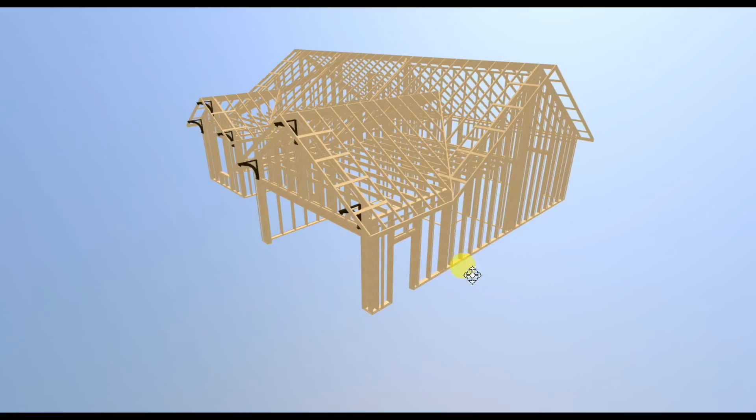Okay, so far we've talked about concrete, which is referred to as dynamic mass. That means that it's monolithic. It has solid mass to it, so that can be extended up into the walls and even into the roof here. So with concrete you're surrounded by concrete, which is especially good here and better than wood, I would say, at those ballistics we talked about, tornadoes.

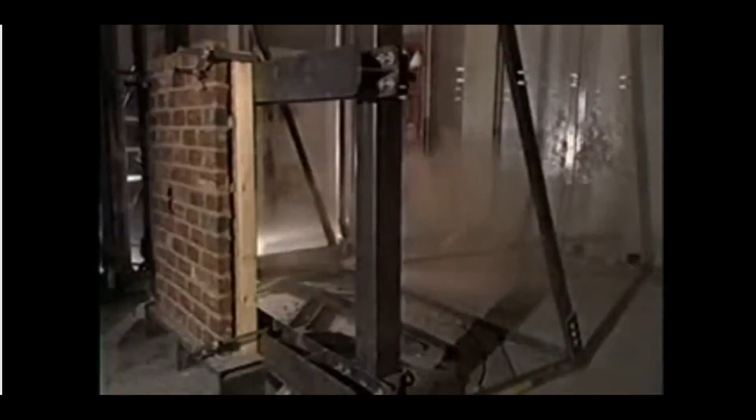Some of the only homes that survived, as proven by places like Moore, Oklahoma, had concrete walls. And like I said, if you get on Texas Tech's website, you can see that the concrete does pretty well, anywhere from 4 to 6 inches thick.

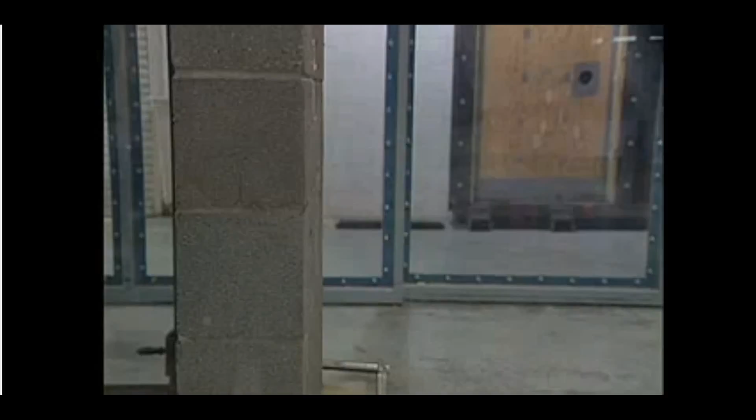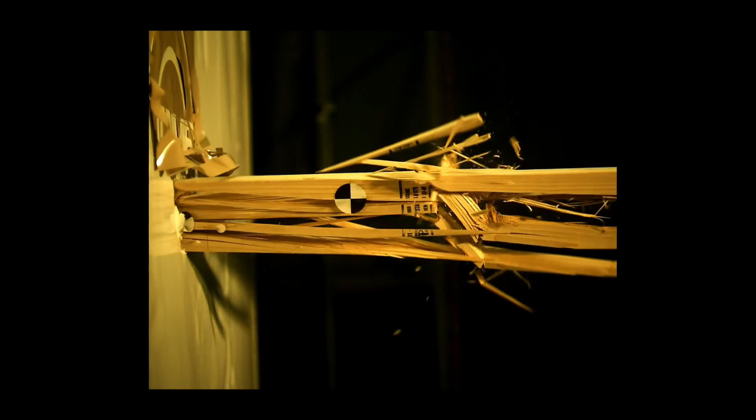So dynamic mass, meaning that it can absorb heat, hold it, release it when it gets cold at night, and then it can also hold and release moisture and keep the relative humidity in the house at a desirable level. Usually 30 to 35% humidity is desired for those mold and fungi properties that I discussed earlier.

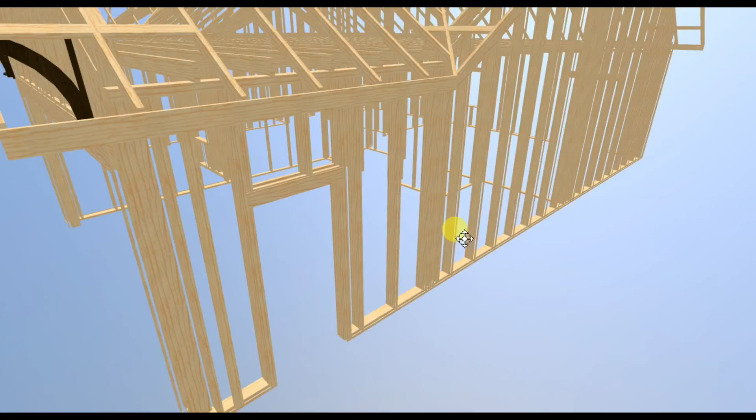So here, in what we've done and what most builders are doing out here in Wichita and across our nation, we're not only addicted to concrete, but we're also addicted to wood. And so what I'm showing here is our 2x6 walls. The industry standard that you'll find is 2x4 walls. Each one of these stud cavities is filled up with insulation. So that's one way we get our insulation values up. But there's more to it than that.

In our designs, there's an engineered gap between the stud and another layer of insulation, what's called outsulation, meaning that we wrap the whole house. In addition to putting insulation in these stud bays, in between these studs, we've put a big blanket of insulation all the way around the house, and then between the two, we have a ventilation gap running here. You can see the furring strips running on each one of the 2x6 studs.

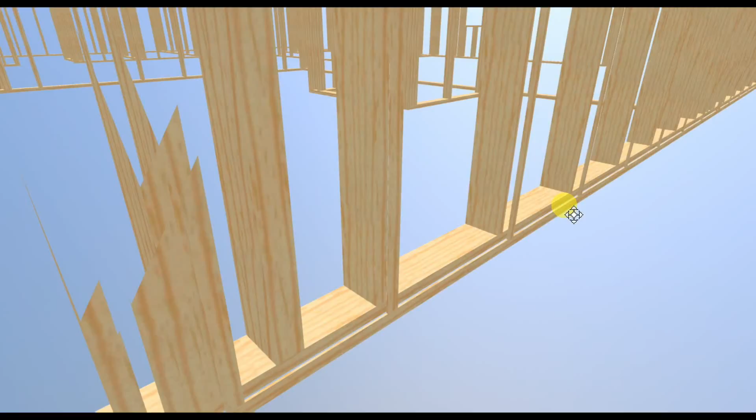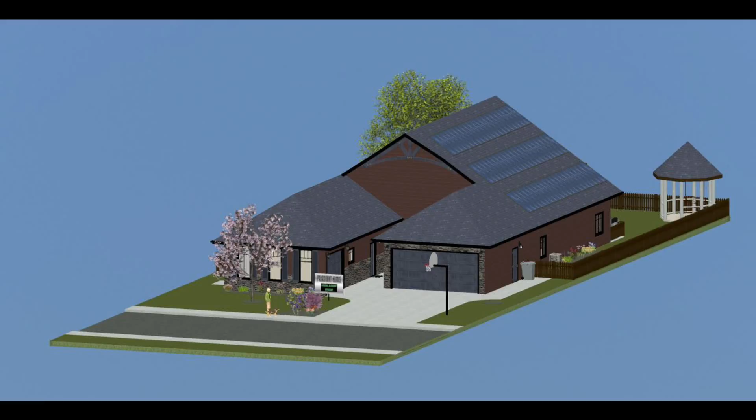So there's a gap here, and it's not just a gap, though. There's more to it than that. A lot of builders and designers that don't know any better think, okay, I just throw a gap up there and I'm good to go. Well, the purpose of the gap is so air flows around this entire house. So it's almost like you've got a house inside of a house. That ventilation gap, when we put on the siding that you see in the curb appeal of the house, preserves it better.

So I talked about how vapor drying needs to occur. Out of the wall and into the interior, there needs to be drying in either direction. So we've allowed for this gap here that has a certain flow, and that flow needs to be verified, that there's actually air flowing through here, so we can vapor dry into that gap. So there's more to it than that.

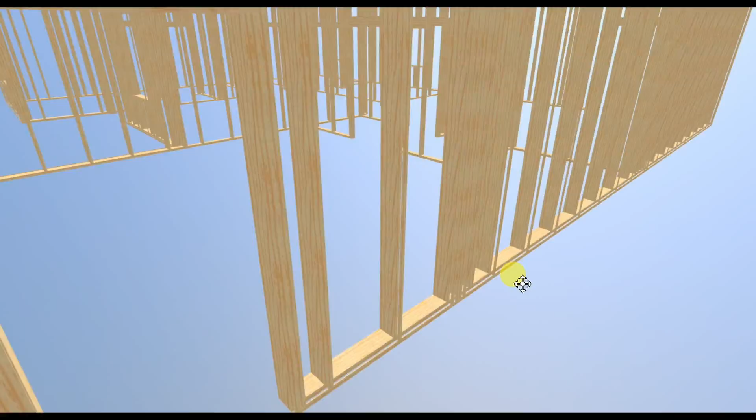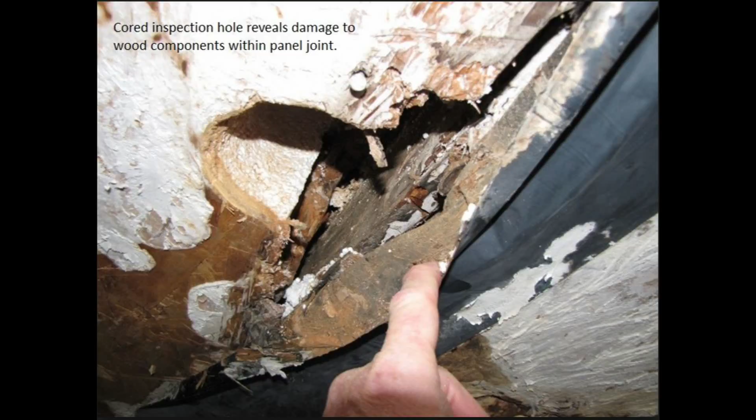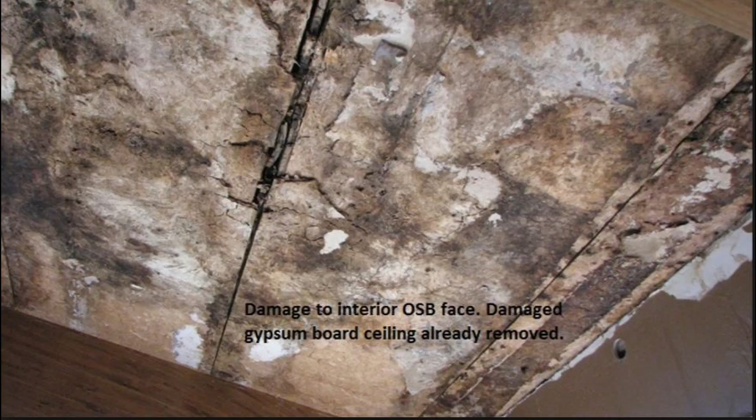There's what they call insulated concrete forms. I'll get into that in a minute; there are some issues with them I'm going to discuss. And then we also have a newer wall assembly on the market called structural insulated panel, where they take that polyurethane foam that I discussed the problems with. It acts like a vapor barrier, and they glue it into some OSB, a particle type of board that's glued together, and that whole assembly is not going to dry in any direction. So that's just a vapor lock, and there are some issues, especially where those panels come together at the seam. So get with me on more of that if you're interested.

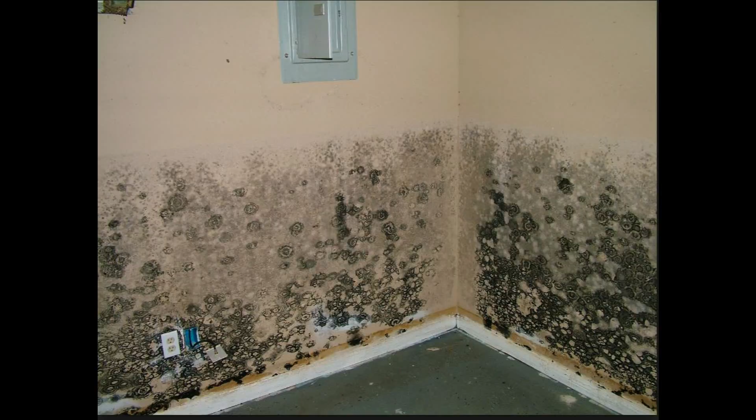If you're about ready to make a decision on a SIP or an ICF, you definitely want to talk to a qualified engineer about some of those issues. They're out there.

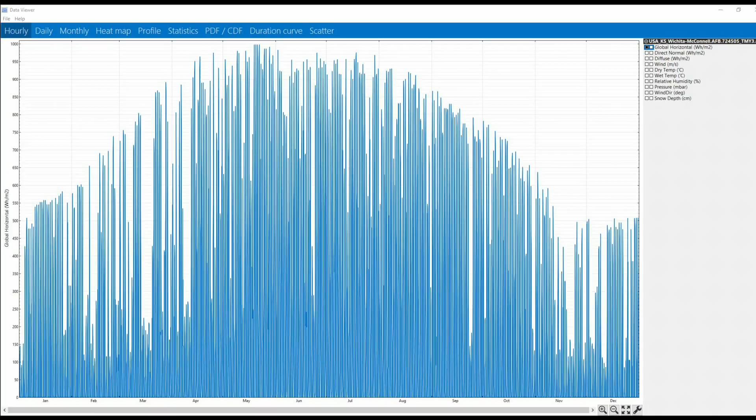It's amazing what computers can do these days. Maybe you're pretty impressed by some of these models I'm showing you, but the other thing they can do, that's more important, that a lot of architects and designers and builders don't have the capability to do, is called fluid dynamic modeling. So there's climate towers that we get our weather from here in the Wichita area, for example, and we could pull that into a simulation model that runs a bunch of airflow around the building, around homes.

It came over from Germany, and Germany has really got it down to a science. They got what's called a WUFI model. It's a fluid dynamic model. So, like I said, these gaps, you just don't throw them out there and hope for the best. There's some engineering involved in that.

So now we've taken what's called Passive House, or Passive House Institute US, a new German type of design philosophy that came over, and they're training people around the country, builders and tradespeople, how to build these airtight homes with the right flows. So that building science term is really taking off with the green movement, but there's a lot to know there, so you want to make sure the right person's doing it.

Everything I just said applies to the roof as well. So basically, let's conclude here by saying that there's two basic ways to design the walls and the roof. One is very highly insulated, where you have a bunch of wood, layers of house wrap. The house wrap doesn't really provide enough gap. It tries to, but when you push those panels up against the stud, you get what's called thermal bridging.

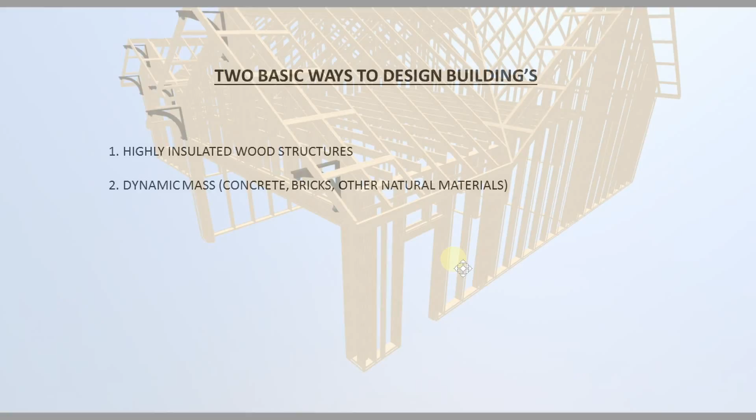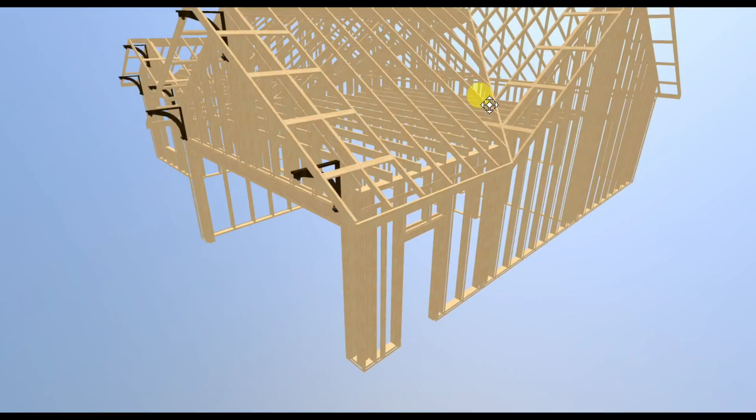That conduction again, that resistance to flow, conduction meaning that the heat goes right through the siding, and the house wrap doesn't provide enough airflow in a lot of cases or a vapor drying path. If you were to take a heat gun to one of these studs with a bunch of solid wood stacked on top of it, the heat can go right through the wood from the interior out, or the cold can get from the exterior in right through all these studs.

You can look up on the internet some pictures of a roof with snow, and you can see each one of these studs has heated the snow due to the thermal bridging, and you can see that the home's losing heat that way. So we don't want that. That's why we wrap the house. We put a ventilation gap in there to break that bridge and provide the right gap. So that's pretty much it for walls. There's a whole lot more to it I'm not going to go into.

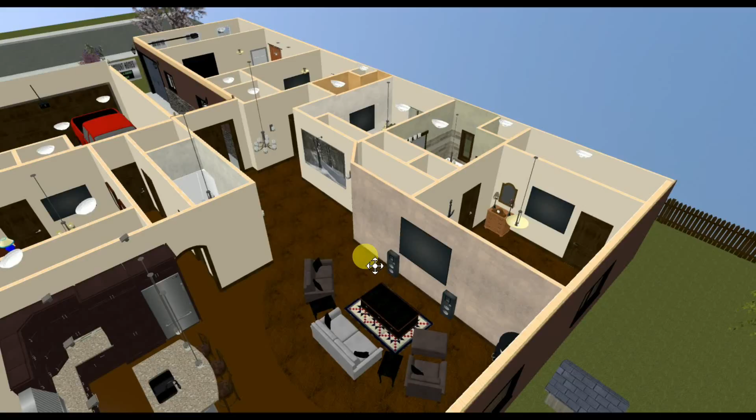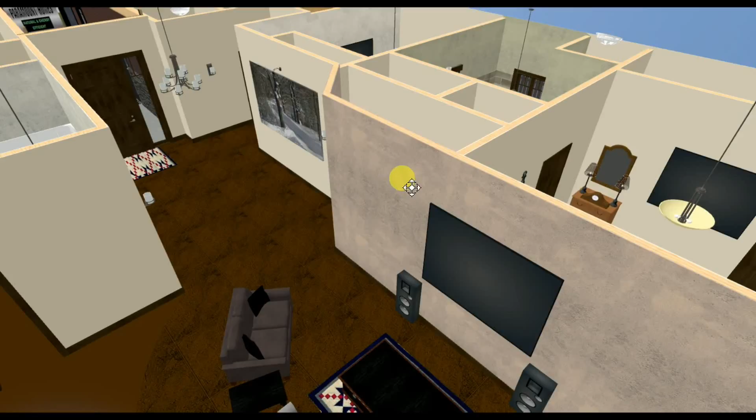So we talked about mass, and the concrete floors. We have hydronic radiant in these floors. It's very therapeutic. We utilize the mass of the floor and run some water through it. Water's got the best heat carrying capability, far better than air, 1,000 times better than blowing air around. So we utilize it with the mass to emit a very comfortable therapeutic heat that doesn't have a bunch of nasty microbials affecting your indoor air quality.

Another thing that we offer as an option is this American clay product that is very nice, very beautiful, that we can put on the walls to help increase that thermal mass and moisture holding capability in the house. You put an inch or two of this stuff inside your house.

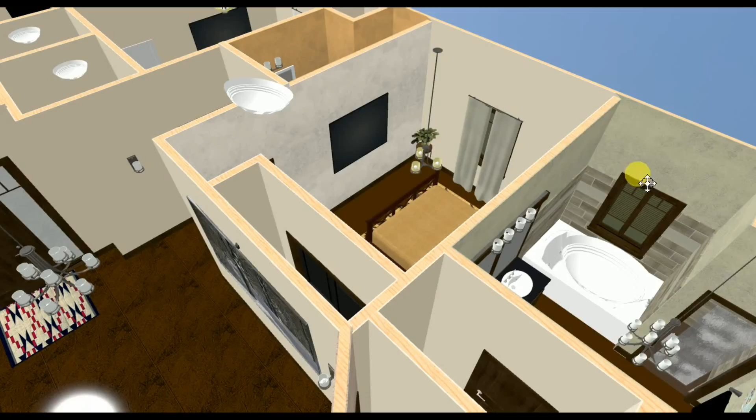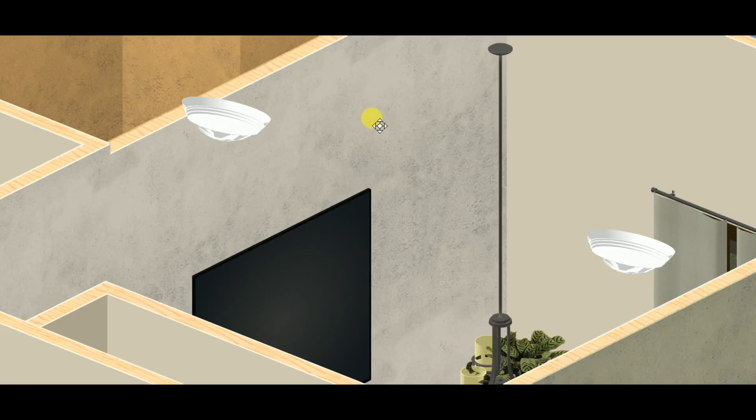What that does is, because it's taking down the humidity level and storing it in the walls, the cooling system doesn't have to be turned on to dehumidify the place and give you that cool feeling. So that helps out quite a bit, especially here in the bathrooms. You can see some other colors that they have here in the bathrooms. If I get up close here, you can see it's kind of got a two-tone.

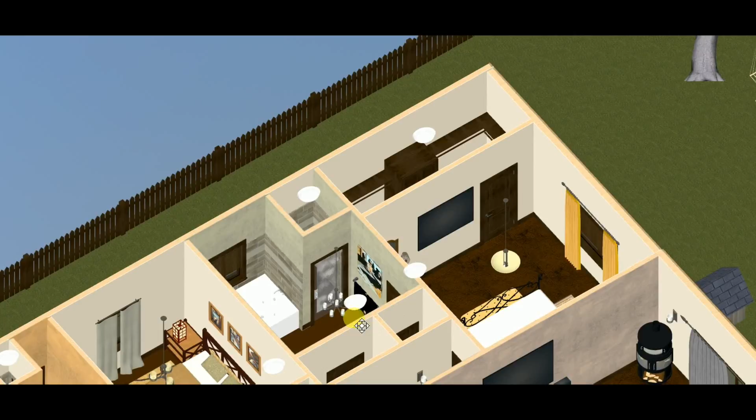You've got all different kinds of options on American Clay's website. We also have other proprietary blends, lime, other types of materials. Think about lime here. It's nowhere close to OSB. It doesn't degrade like wood or some of these other floor laminates and glue products. It doesn't start degrading when it sees moisture. It actually improves. Lime, for example, is limestone.

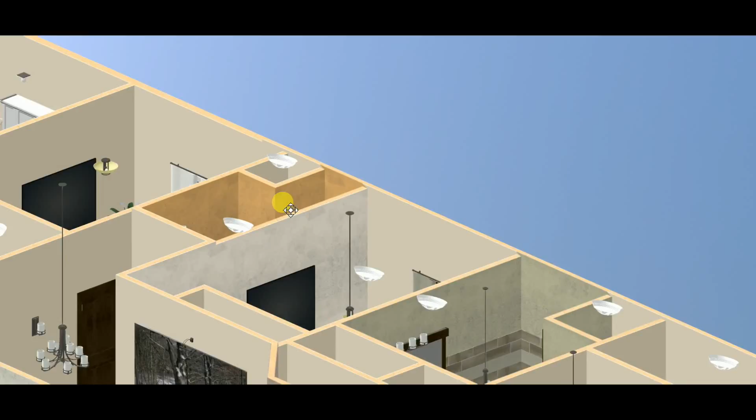So when you put the stuff on your wall, every time it sees moisture, it's actually trying to convert back to a rock, so it absorbs and holds that moisture that these other materials don't do. They degrade, and it just gets stronger and stronger and stronger. So, like I said, not all materials are created equal.

There's a lot to know about the type of materials that are in your house and whether or not they're going to deteriorate in time, and whether or not they're improving the indoor air quality, and either they repel moisture or they love it. In the case of lime and earth plasters and different types of natural finishes that have been known for centuries, they get better.

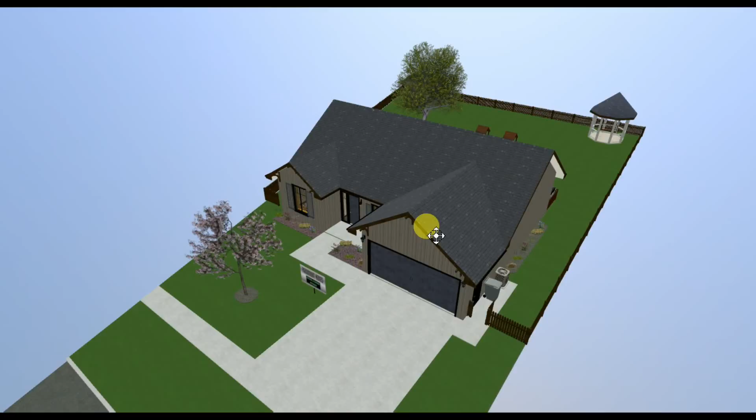Those are the kind of things that the manufacturers don't want you to know. You can find some of these materials in your backyard. The building sciences won't promote them, and you won't find them in building codes.

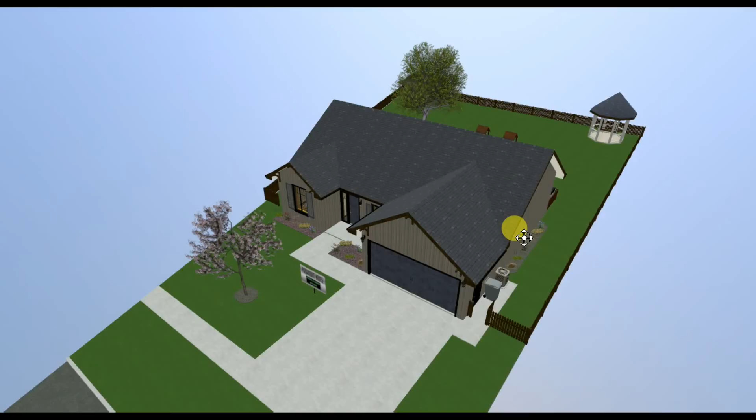I mentioned briefly in the Paraflat and the Paraflex videos about the ventilation systems that we're putting in these homes because we blower door tested them. And so there's two different types. There's what's called a heat recovery ventilation system that doesn't help manage the indoor humidity levels and keep those cooling bills down. There's also an energy recovery ventilation that does, and so it's got a desiccant material in here.

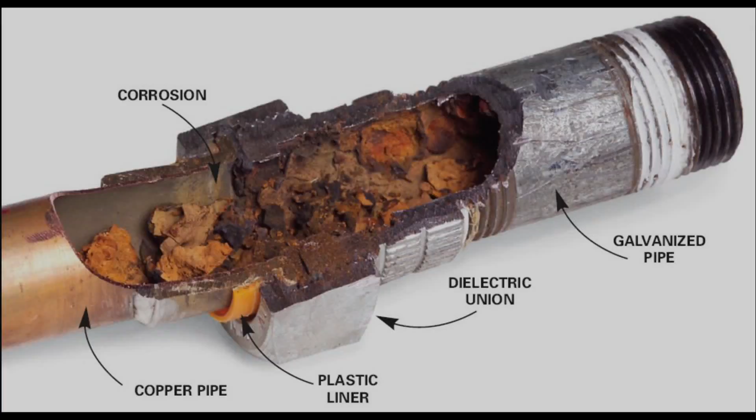Air comes from outside, passes through a heat exchanger and a moisture transfer exchanger, and then it comes into the house, ventilates it, and comes back out. I mentioned the plumbing systems, just like everything else that I've discussed. If the plumbing connections aren't correct and the types of materials that are joined are incompatible with each other, there will be a galvanic reaction and a bunch of junk accumulating at those connections.